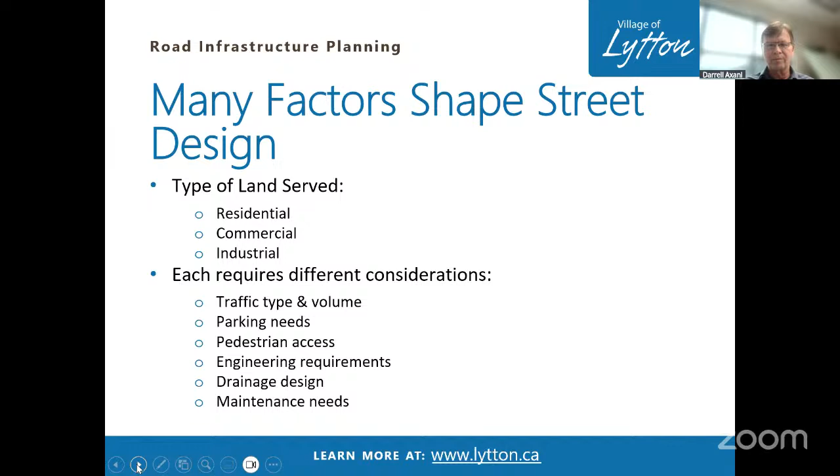So one of the questions we want to ask is, do we want the roads to look exactly like they were historically? And in some cases, we can see that. And in some cases, during the remediation, we can't, because a lot of the stuff has been damaged severely. So some of the modifications that we could take a look at is where do we want sidewalks? Do we want sidewalks on both sides? Do we want sidewalks on one side? Lower traffic areas may not even require a sidewalk.

So for example, maybe up on Station Road, we can take a look at whether we need a sidewalk or not. So there'll be some input required there, and what does the community want to have there? Some compromises, of course, may be needed depending on what our funding allocation for the particular repairs is. Typically, for all the grants that we've brought forward to council, we've included a portion of sidewalk and curb repair. Next slide, please.

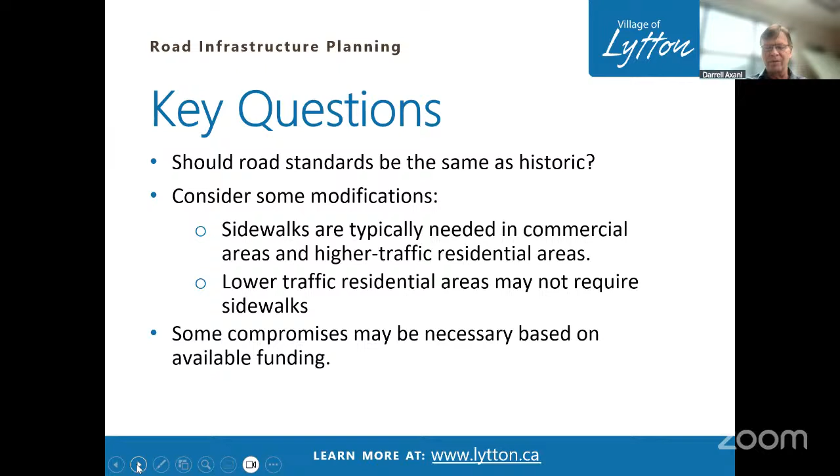So in the existing subdivision servicing bylaw, we have three typical sections, as we call them. This defines the road elements that council has historically approved. Before you, we have a local street standard, which I would call the residential standard. And it's divided into a major and a minor. Typically, a minor is a little bit narrower with parking on one side. A major has parking on both sides. In this case, that section shows a sidewalk on one side only.

And then another one is downtown commercial. This is essentially the same, but it has sidewalks on both sides, and it's a little bit wider to accommodate parking on both sides. There's also a third which has not been presented, an industrial standard, which we don't really have a lot of use for in Lytton. I suppose we could discuss the North Station section where there's access to the CP rail yards, which probably could be classified as an industrial section.

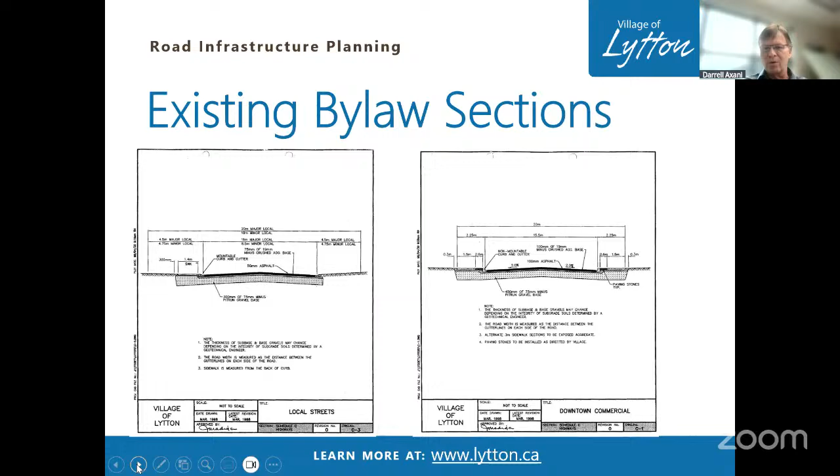And by the way, there's also a few additional slides that we'll have later on and a map that's not in the council package. So when we get to those, we'll discuss those further. Okay, next slide, please.

Okay, so for the fundamental elements for the local or residential standard, there's 2 traffic lanes each direction, 1 parking lane, and possible streets that we may consider currently that are built to this standard would be First Street and Station Street. That would be north of 6th. And typically we consider these suitable for residential areas with low off-street parking demands.

If you get into a situation like a terminal end side road, such as a cul-de-sac, in a lot of cases in other municipalities, the sidewalks aren't provided. It depends on pedestrian flow, and if you have pedestrian walkways and walking paths, for example, maybe you need a continuation of a sidewalk for pedestrian access.

High traffic residential streets may require sidewalks and parking on both sides. And in the village, I would consider maybe Fraser Street would be classified as this. Fraser Street is fundamentally built to the downtown commercial section, but it'd be considered a residential, with the difference being it has sidewalks on both sides, not just one side. Next slide, please.

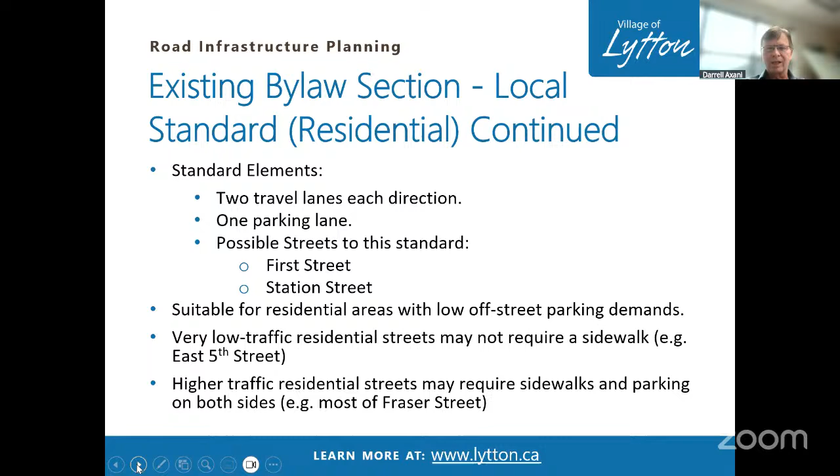So for the downtown commercial configuration, there's 2 travel lanes each direction, 2 parking lanes, and streets to this standard we consider Main Street and Fraser Street, and also 2nd through 6th Street. Now, historically, it looks like there's typically been 2 drive lanes each direction and a parking lane on 2nd through 6th. In some cases, 2nd, I think, is probably primarily residential, so perhaps we could consider alternate configurations, and perhaps we could extend that to 3rd, 5th, and 6th as well, depending on the access to properties that are required.

For drainage improvements, I've noticed on 3rd and 4th Street that the pavement is failing in sections, and this is largely, in my opinion, due to poor drainage. So there's saturation of the surface soils, and that's creating a weak layer underneath, and as traffic rolls over, it starts to fail the roadway. So when we're improving this in conjunction with some of our deep services and how we're disposing of drainage runoff, we want to consider how that all comes together so the road will give you an adequate life.

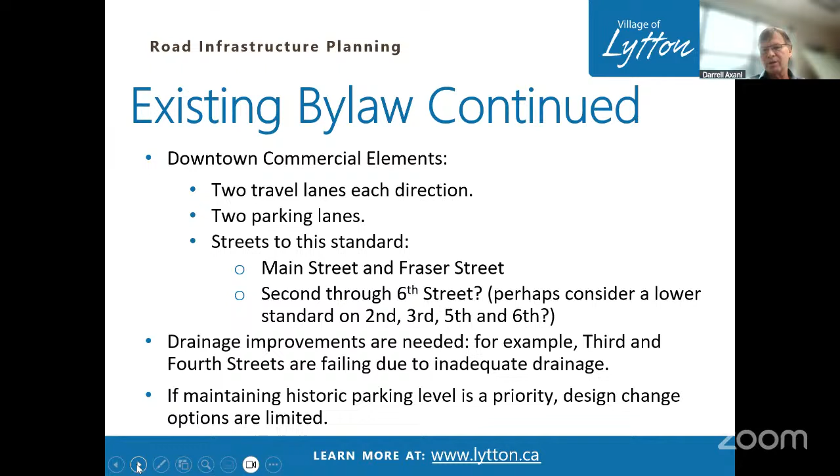One of the things we'll want to consider is, historically, what have you seen for parking needs in the village? Do we want to maintain the existing roads and parking levels that were there previously? Was it inadequate, or was there too much? So that's a conversation that we should have. Next slide, please.

So this section is one we did up, and this is essentially similar to what we have at a downtown commercial. But what I've done is I've added in some of the other utility elements that you typically see in a municipality. So now we can see the underground. It's also showing where we may put a hydrant, street lights. It shows where hydro and your communication TELUS lines would go. And if you have gas, it shows where Fortis gas goes.

Typically, long term, and I'm not thinking just short term, but long term, you may want to be putting some of your utilities underground. So you want to plan for that in the near term, because if you start putting other utilities in that space or corridor, you've got a situation where you don't have a proper place to put those utilities down the road. So in 20 years, you decide that you want to go underground in certain areas. Well, now if you've got a sewer line there, you can't do that. So you have to relocate the sewer line. So it's nice to look at that early in the design when you're putting these streets together.

So in terms of critical elements, it is primarily space requirements. Water requires 3 meter spacing from other deep services just for contamination purposes, to protect from any influence. And the second, probably most important, will be underground power. That has to have certain space requirements from other elements like gas and your communication lines. If you are going overhead with your power, it's not really the same situation. You just have to make sure you provide a suitable corridor for that line to go in. Next slide, please.

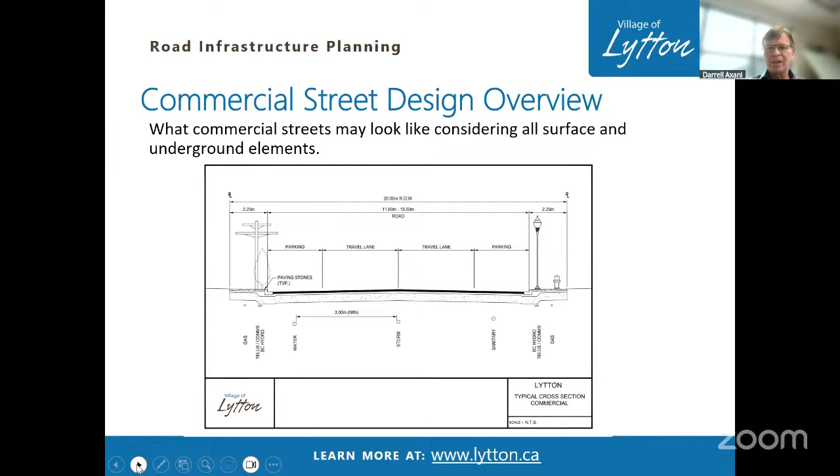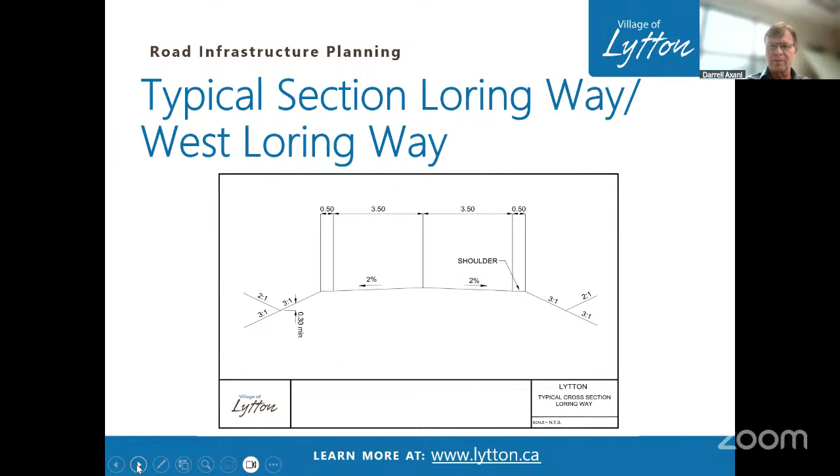So this is one of the sections that I added that wasn't in the council package, because I just wanted to discuss broadly across the village what the street sections are. So I would consider this an urban rural, is what it typically would be called. It has 2 drive lanes, a shoulder. It also will have utilities in the ground, water and sewer typically, and any storm drainage and runoff is usually handled through a ditch system. Next slide, please.

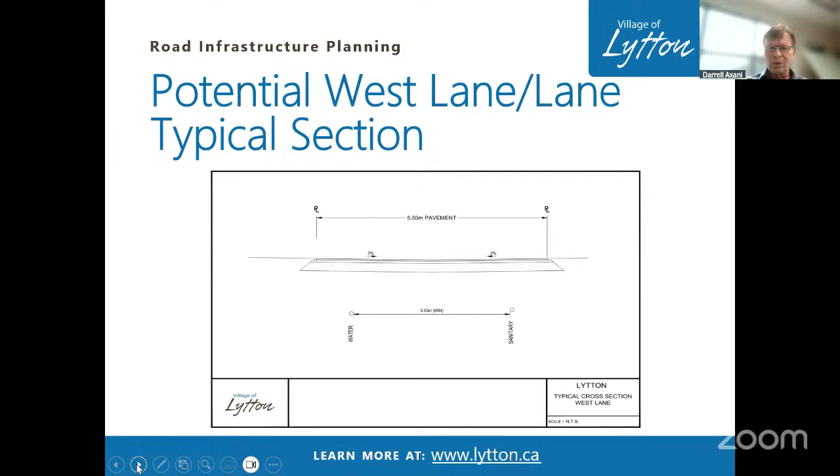The section we're showing here is very typical to what we'll be doing on West Lane on the upcoming construction project. It'll be very similar also to other lanes like Alonzo and Center Lane, with the difference being that some utilities will be different. So, for example, Center Lane will be putting in a sanitary sewer and a storm sewer. There is no water. But Alonzo and West Lane will have water and sanitary sewer. Next slide, please.

Again, this was just an overall map. Wanted to generally show you where these current roads are located. So the red on the bottom of the figure, that's the urban rural configuration with open ditch drainage that we have in the village right now. The pink or magenta line is generally the downtown commercial. The green lines are generally the residential standards, the local standards, and then the blue is the lane standard. Next slide, please.

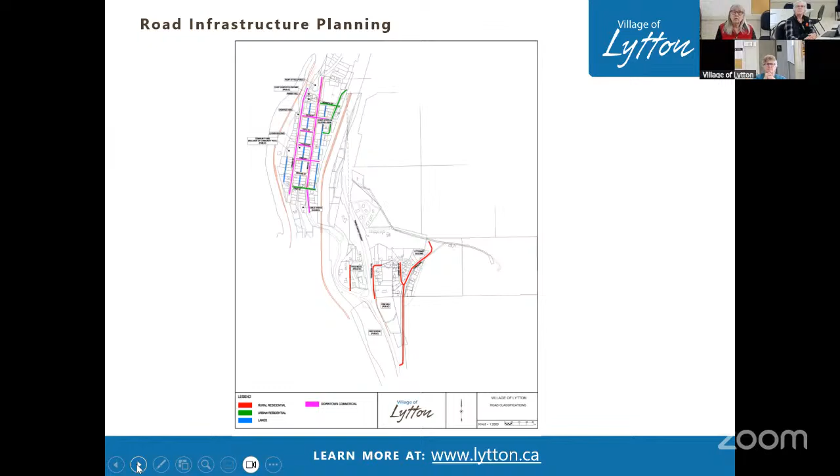So in terms of how much we want the streets to look like they were historically, there may be a limited amount of changes that we can make. Most streets are typically 20 meters property line to property line. We call that the road allowance. So we've got to fit all the utilities and the suitable widths for parking and for drive lanes and for your boulevard areas, sidewalks. We've got to fit all that stuff in there.

So considerations you can make is do you want to have some softscaping in terms of grass and street trees? Or do you want to have patio pavers and that sort of thing that may be lower maintenance, but then in the summertime you may have issues with respite from heat and so forth. And again, for parking, we want to have adequate parking to accommodate the particular land use that we are accessing.

So all the utilities will have a corridor. Typically this is an early planning phase where we want to look at the location in the street of the water mains, sewer mains, storm mains, or infiltration systems, as the case may be, street lights, sidewalks, parking, and shallow utilities like hydro and communications and gas. Next slide, please.

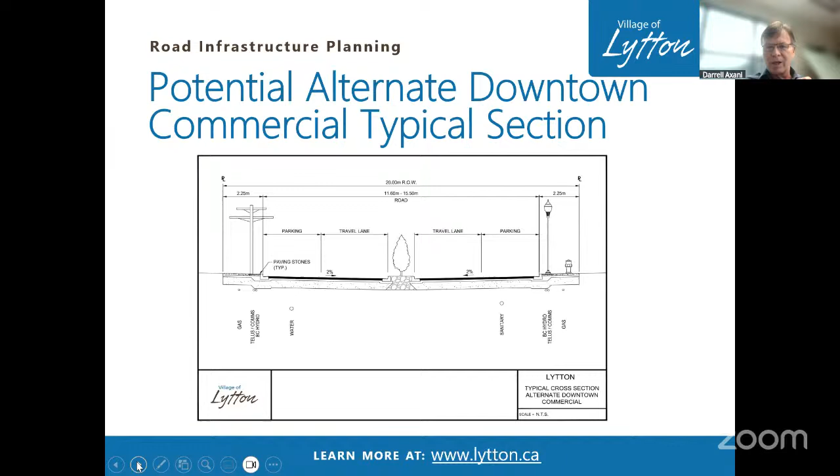The soils are quite amenable in Lytton to accepting infiltration and water. But the side benefit here is that you don't have to have public works staff going and watering trees as much. And then the water would just generally soak away into the ground and not discharge down to the outfall at Hobo Hollow.

And we have here some general samples of streetscapes. These here on the left, you would have like a residential standard, trees one side. You can see the ornamental street light on the right side, and then a parking lane. Similar on the left side, same sort of thing, trees on one side and parking on the right side.

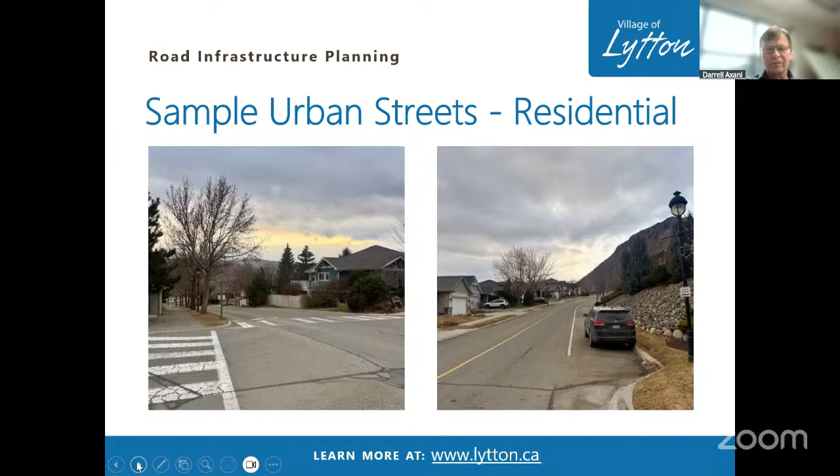And then here's some samples of typical urban street sections. And this will be largely what ultimately your downtown commercial will look like one day, where you've got parking on both sides, two drive lanes. And you can see there's a street light in one of the pictures, and also some overhead power lines.

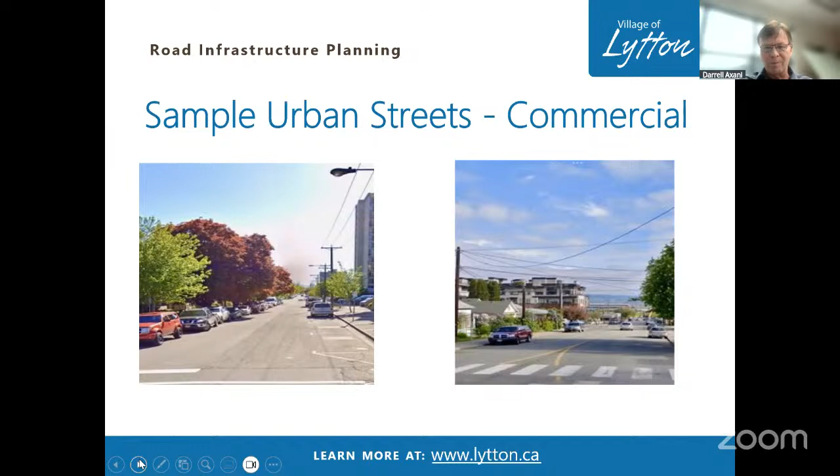Okay, discussion. Well, thank you, Darrell. Something that you said, or that I read on one of the bullet points, was how the community may want this to look. And I think that's what we're here for, considering budgets and future development and all those kinds of things as well. I'm wondering if you go to the slide that lists the modifications to consider, and then we can use that to get discussion started.

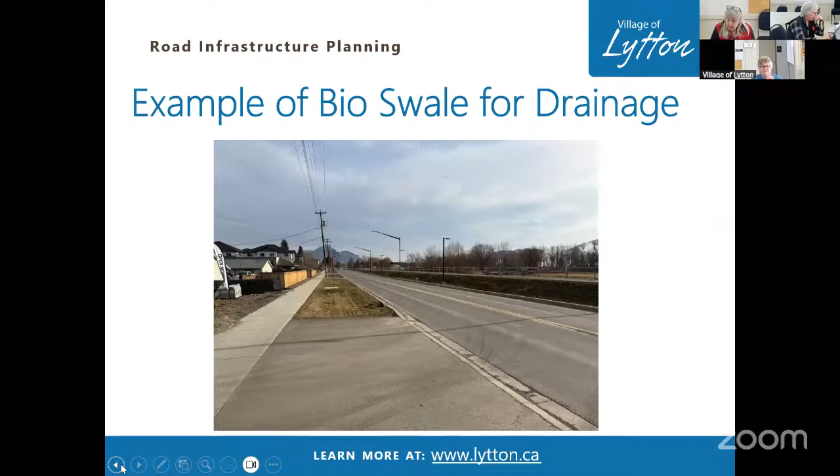It's just near the end. Yeah. I just think that it helps to highlight some of the things that you're looking for around discussion. So who would like to start? Would anyone like to begin with thoughts, comments, ideas? Councillor Thomas. Thank you, Mayor O'Connor. I only have a few comments.

Just in regards to grass or trees, I think irrigation and maintenance are going to be so paramount. We've not had a lot of luck in the village of Lytton in the past keeping trees alive. So if there's no irrigation, even with that center proposal, I don't have a lot of faith in rapid growth of trees, the water source being the main concern. I don't think grass is something we want to maintain. It's pretty tough, but a canopy of trees is something I personally think would really benefit the village. And we've talked a lot about the benefit of trees in the past.

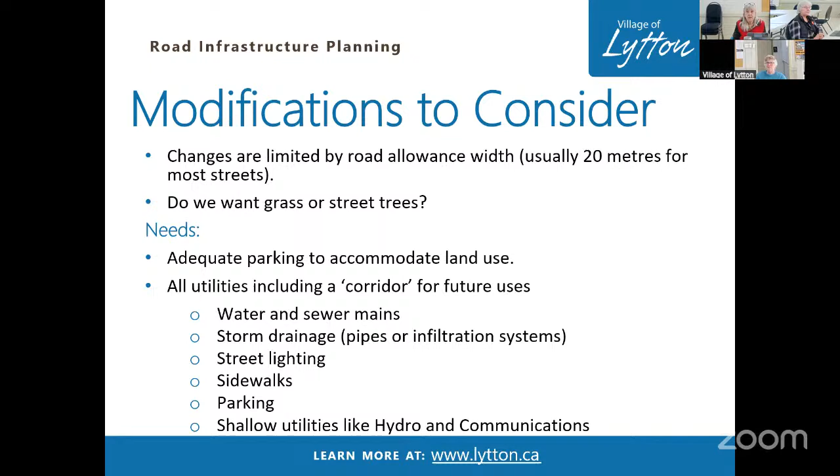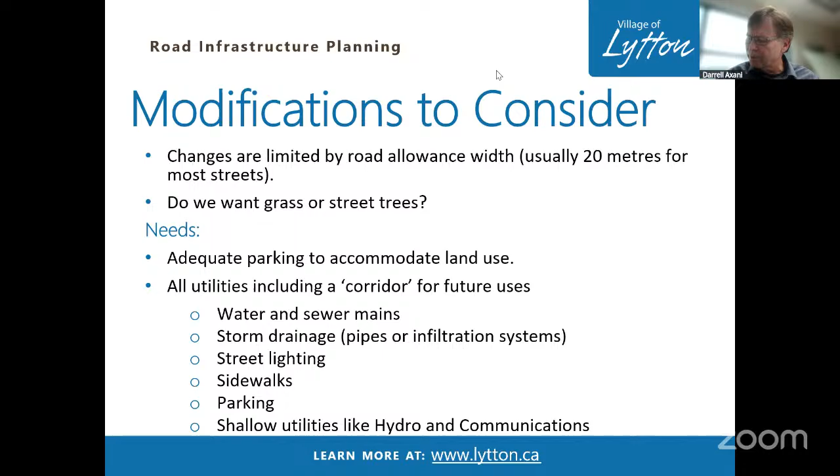I'm not seeing any more hands up or people that would like to comment. Again, Darrell, is there anything else you're looking for from us? No, I think that gives us a little bit more direction. It does sound like there is probably not a lot of support for a center bioswale setup with trees and stuff, which is fine because an alternate option, if we have curbside drainage to the outside of the street, I might look at some CB drywell infiltration systems that reduce the amount of runoff we have to direct to pipes and such. So there's still options and backup plans that we can look at.

In terms of the options that you've identified, one of them is we've got the existing bylaw section, which I think is still fairly relevant. Options that we could consider to change on that is maybe adjusting the lane widths, but also looking at angle parking, which seems to be some desire for. So I think we should take a look at an option like that.

Councillor Thomas. Thank you. Just one last comment. I'm thinking because Lytton First Nations are a major landowner and the biggest personal landowner in town, maybe a conversation with them about what they see as the future for parking in front of their large Main Street development, or hopefully potential development, might be in order.

Thank you. Okay, so we do have a two-part recommended motion here to receive this for information, and then, of course, come back to a regular council meeting with a report. Councillor Lightfoot will put that forward, seconded by Councillor McCann. All those in favor? Carried. All right, moving on to new business.